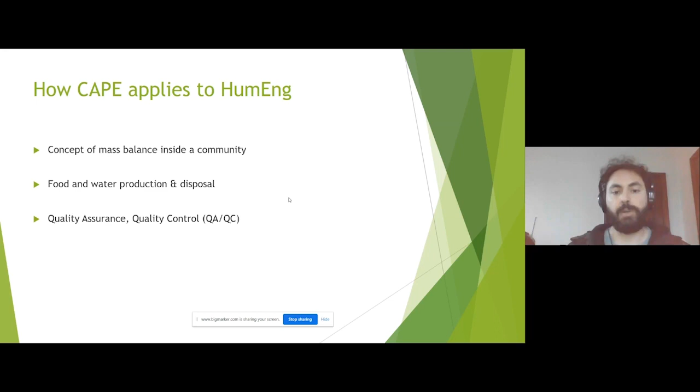And something that I think only us chemical engineers understand quite well is the limiting agent or reagent or reactant in these concepts. That's something I always think of - what would make this stop, or what's the most important aspect in whatever concept we're dealing with - and trying to go a little bit deeper on each of those concepts with my vision of humanitarian engineering.

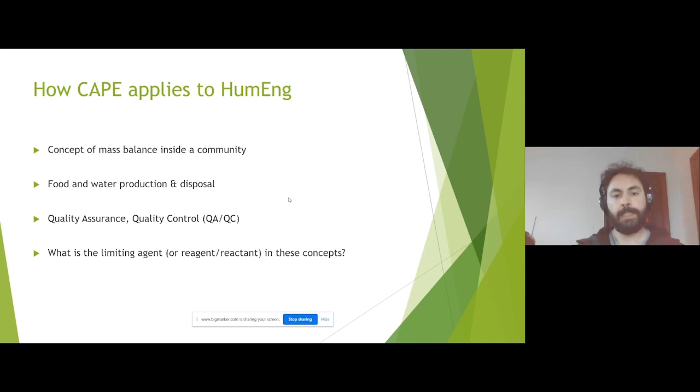So yeah, mass balance. Well, you look at the reactants, products, and byproducts. So what gets in and what leaves the community?

I think when I arrived to the community, the most important aspect for me would be water. This is drink every time, every day. So good water means good food. And when water-related disease outbreaks, it's very bad.

It spreads very quickly, so assuring you got good water is very important. So water and food - I think about the water as a whole. You got drinking water, wastewater, stormwater, irrigation in a community. A lot of people think, oh, this is the drinking water, wastewater, stormwater, but they are related. They can be reused, and that's very important to treat the drinking water and the wastewater, and understand the availability of those and seasonal changes as well.

So here in New Zealand, in Brazil, we are very lucky. We got good water, and it's available to most of people, but that's not the reality worldwide. And also seasonal change.

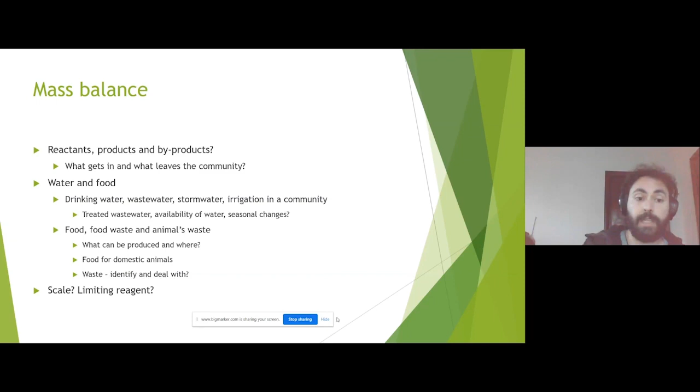And also the scale - what scale we're talking about, and what is the limiting reagent of it. Also, when we talk about food and water source, is it from the river, from rain, from groundwater? If you know the water source, we know a bit better what to expect about the water quality and what would influence its water quality.

So if it's from the river, you know that under storm conditions a lot of pollutants would go there, and if there's animals around, all the animals' waste would go there as well. So we need to be careful about that. Groundwater is another matter - so would be if there is any septic tank around that area, and then that's something that needs to be worked out with the community.

Quality and quantity - that's something I always think of when I think about water: seasonal availability, and treatment. Does it require any treatment, pre-treatment? Can it be used to wash clothes, wash hands, to drink, to boil? That's something that for chemical engineers is very core thinking when we arrive to a community.

Food produced locally or bought from other communities - what can be made locally that is currently purchased or traded? That's something I always looked at when I was traveling.

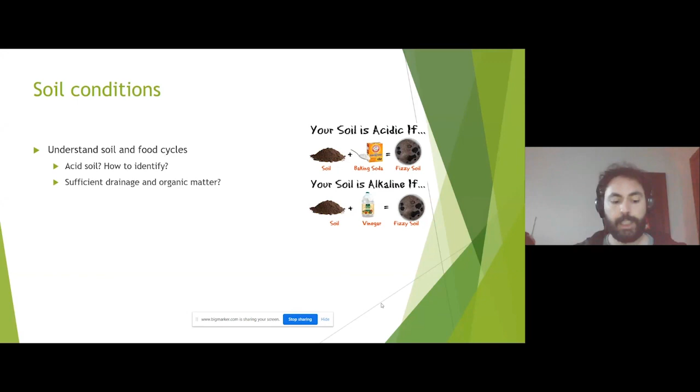There's no magic, just little tricks that might help people understand their soil conditions, and also if there is sufficient drainage and organic matter. If there is no sufficient drainage, the water doesn't flow to groundwater, and sometimes the soil is too dry, so when it rains there's only surface water running off, which doesn't infiltrate and recharge groundwater. It wouldn't make good conditions for plant growth, and that can have an impact. So if we arrive at a place we can identify those things, it's very good to help any community.

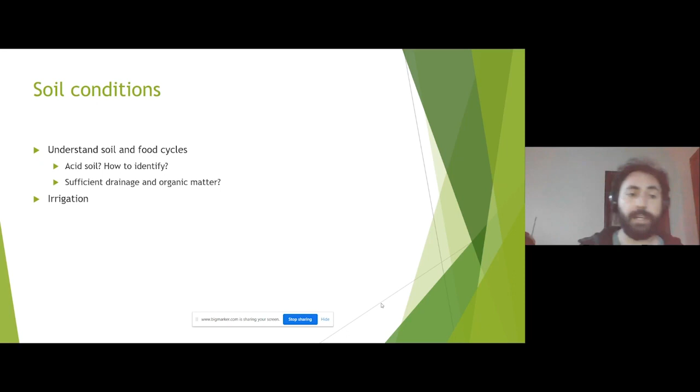Also irrigation - due to seasonal variability, if you work out the quantity and quality of water, you can actually use that for irrigation, for example, and also for the use of fertilizers for plant growth.

A lot of places don't have enough nutrients, so people tend to use synthetic fertilizer - you buy it, do the mix, and magically it works. But do we need it?

In poor communities, we have plenty of food waste, human waste, and animal waste that could be used as organic fertilizer. That's something I, as a chemical engineer, always try to think about because I've worked in a wastewater treatment plant, and you see that the solid waste from a wastewater treatment plant is very nutrient rich if properly mixed with soil and with good sanitation - it works even better than synthetic fertilizers.

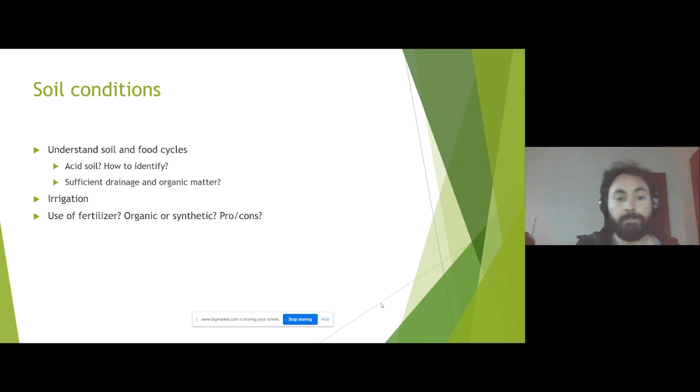So there are pros and cons. It's up to you to talk to the communities and understand their needs and their willingness to do something different or not - and also the wastewater treatment feasibility. So this idea here...

I talk about soil conditions because the way we deal with our waste affects soil conditions. For example, if you have a septic tank and a sinkhole, it's likely that you might impact the soil around it and also the groundwater. The image here is a concept of biogas generation for households, and this is actually one constructed in Brazil. It's becoming very common in rural areas.

As you can see, we've got intakes - the toilet or some animal waste - that goes to a gas chamber where anaerobic digestion happens, and the gas goes over here. Over here we've got an outlet, and the bio slurry that comes out is also nutrient rich, so you can use it to irrigate and fertilize soil.

And this, as you can see here, is a homemade one - a 3,000 liter tank turned upside down, which goes up and down depending on the amount of gas it has. Over here there's a 20 liter water container used as a filter, so the gas bubbles into the water and part of the smell stays in the water instead of going out in the line.

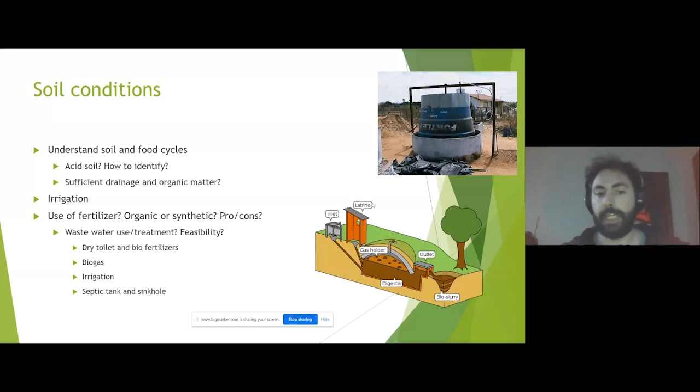That's how I think we chemical engineers should think when we go to a place, but there's also feasibility to consider. Brazil is a very warm country, and the weather is very good for this type of reaction. In New Zealand, that wouldn't be the case because it's a bit cold - a 10 degree difference in a microbiological reactor does make a big difference. So you need to judge the community's willingness to do that, and whether it's feasible as well.

And also quality assurance and quality control. I think the COVID pandemic brought to us the sanitation standards, and that's something we need to talk about with communities, because these sanitation standards are different worldwide, and the more we talk, the better it is. It would be about the water aspects, the food aspects, and also what they use to irrigate or fertilize the soil, if that's hygienic as well, pesticides and other things. So I think that englobes a very wide range.

But it's definitely our job to look at and talk about it. So when we talk about QA/QC, which is the best process for drinking water, they scale limited reagent and trained people, so to do short term, mid term, long term. That's something we need to think about. And there's a wide range of different techniques you can perform, so it's up to us to judge.

So this one is a UV light technique that kills up to 99% of the germs, exposed for around 24 hours. Boiling water. This is a chlorine tank, chlorination tank, and this is very common back home in Brazil. It's a classic ceramic filter, so it uses gravity to filter, so it's very slow. But because it's ceramic, the water stays fresh, and it's very good to drink regardless of the outside temperature.

And also food preparation and preservation. That's very interesting because a lot of people leave food unattended, drying in the sun, and you've got flies, you've got worms, you've got a lot of things. So how do you prepare and preserve food with minimal sanitation standards? I think as chemical engineers we can actually talk about it and explain this to the people.

And the last one would be feasibility of production. It's very good to empower people to produce something, to do something that might generate profit, or even avoid having to buy from a source outside the community. One thing that I think is important, that my grandma used to do like 30, 40 years ago, was soap.

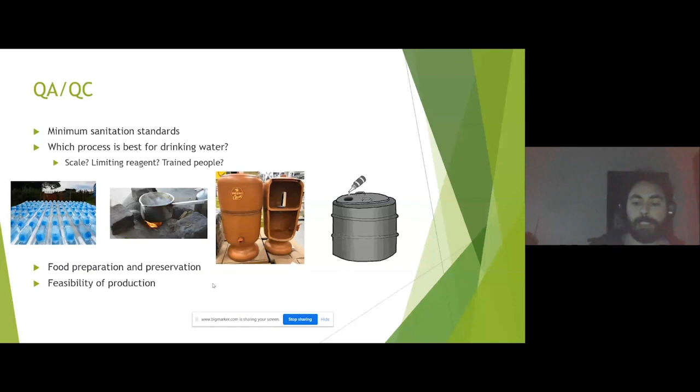Into water and community-based engineering. There are a few questions from the audience that I believe we can cover. So the question from Samson.

Was it securing your first bit of work experience? Say again? How did you go about showing the initiative for your first construction job overseas in New Zealand?

It was interesting because at the time I didn't have a work permit, a work visa, so I was a tourist at the time. So actually knocking on companies' doors and asking for a job, saying I'm an engineer, I'm looking for a job, I'm up for anything. And this company actually hired me because I hold an engineering degree. It was challenging because most of the working tools I'd never used before, but once you understand the technique, it's good. It was very rewarding, helping rebuild the city.

I agree with that. There's a question from Azriel. It is so important to make sure you're introducing the community to planning discussions. Have you found any key techniques for bringing your experiences and knowledge to these human-centered designs?

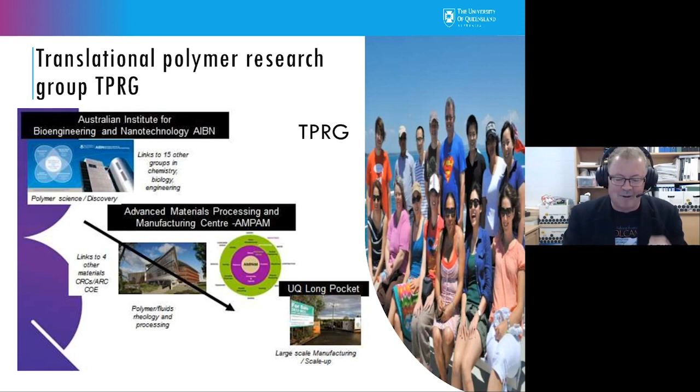Our TPRG is spread over many buildings here at UQ, but essentially it goes from polymer chemistry through to polymer processing and chemical engineering through to modest size scale-up processing at our UQ Long Pocket labs. Industry comes in sometimes to do what they call small, we call large, batches of extrusion or film blowing out at Long Pocket. So we're a very translational group.

Why would we want to look at sustainability now? Well, we live on a big spaceship and we need to live sustainably, and as yet there's been no other spaceships for us. So that's very simply why we need to be careful about what resources we're using. In terms of plastics, since the 60s we've seen basically a 20 times increase in plastics being produced, but unfortunately only about 9% of it is recycled.

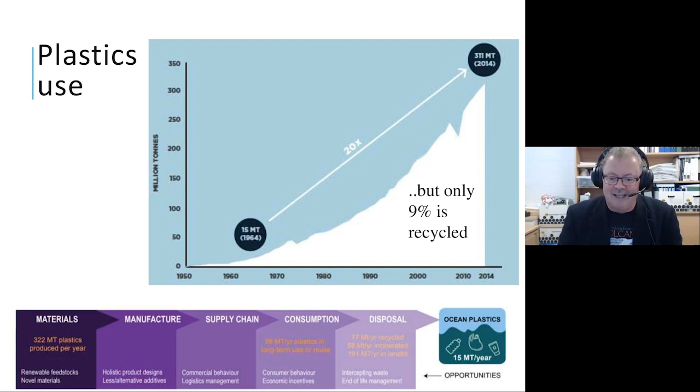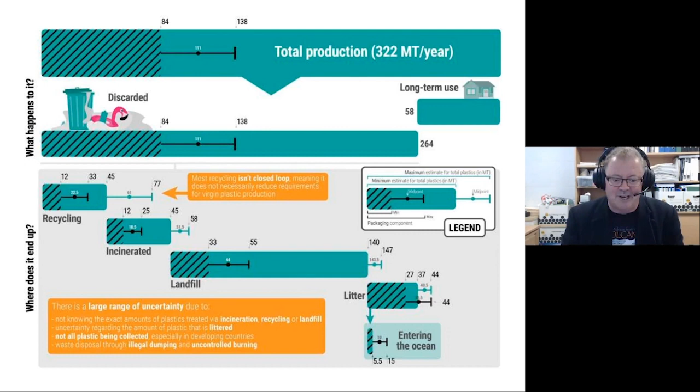So we have to do something about our use of plastic, and that doesn't mean we throw everything away, because some plastics are very important. They stop food waste, for example. They are protective. Some are high performance plastics that reduce weight in vehicles and therefore increase fuel efficiency. But we want to make sure we value the plastic all the way through to its end of life, and in fact we want to generate new markets for plastics.

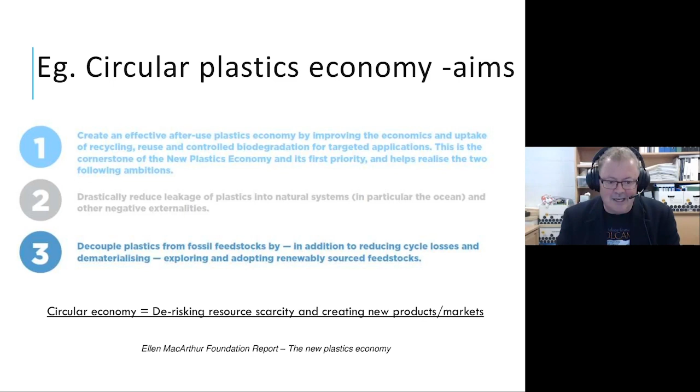She's basically said there's three things we need to look at for the circular plastics economy. They're written up there, and they're also on this diagram too. Firstly, she wants us to look at an after-use plastics economy.

Normally when virgin plastic is used, only 9% of it's recycled. We want to increase that amount of recycling by making other uses for plastic waste. In fact, she doesn't want us to use the term plastic waste. We want to keep saying plastic is a resource that is wasted at the moment, and we want to make sure that resource is recycled and reused.

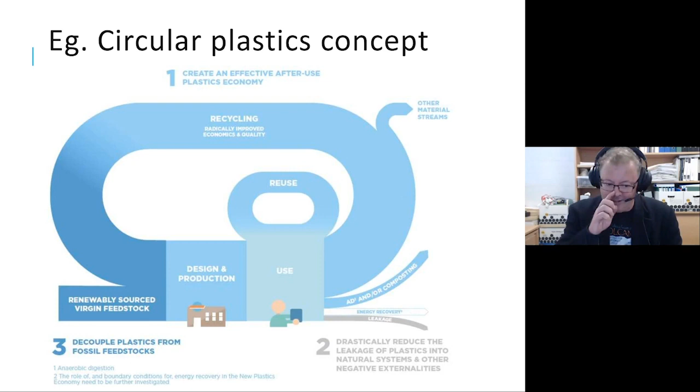And also, this will mean stopping leakage of plastic into the environment, like with marine litter and any litter actually, and also decoupling the use of plastics from traditional fossil feedstocks and maybe looking at biosources.

And that's probably where our research comes in. Traditionally, plastics are usually produced and then perhaps either recycled for reuse, or you can look at chemical recycling or mechanical recycling of plastics, or even returned to original materials and then reprocessed. But what we're talking about here is this additional bio area.

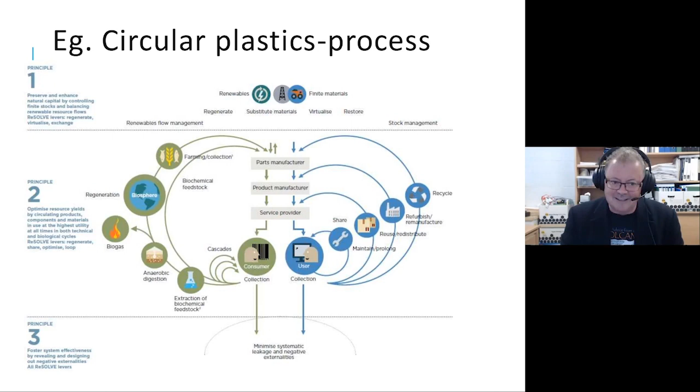What if we started to also get bio sources for polymers and plastics, and we're able to recycle them, either back through anaerobic digestion into biogas, or back into use as a biochemical feedstock for further plastics. So I guess that's what this talk is about, the bio part of the circular plastics idea.

Many people have probably seen the different ways of what happens to plastic waste. A lot of it's happening at the bottom, but we can push upwards and try to look at other options for plastic waste. It has the same calorific value as fuel, so why are we not trying to retain energy at the very least from plastic waste?

Can we recycle? Can we compost? Can we reuse it? Can we reduce its need to be used in the first place?

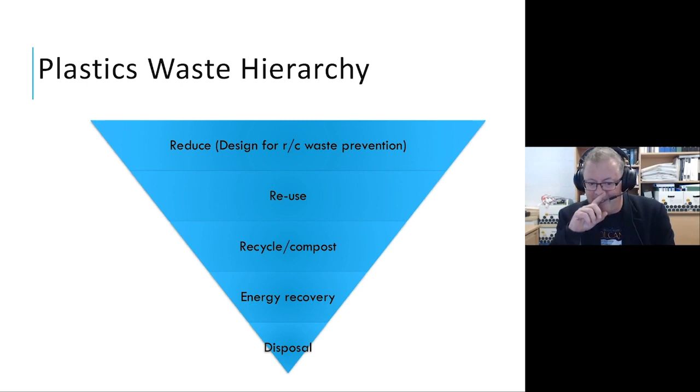Dow Plastics at the moment have huge research going on about replacing the 7-layer multi-layer film made of essentially different types of plastics with just one layer and maybe some clever nanomaterials inside that achieve the same type of barrier properties as the multi-layer film would, and therefore the single-layer film will be easier to recycle. So anyway, there's different ways of trying to stop plastic waste.

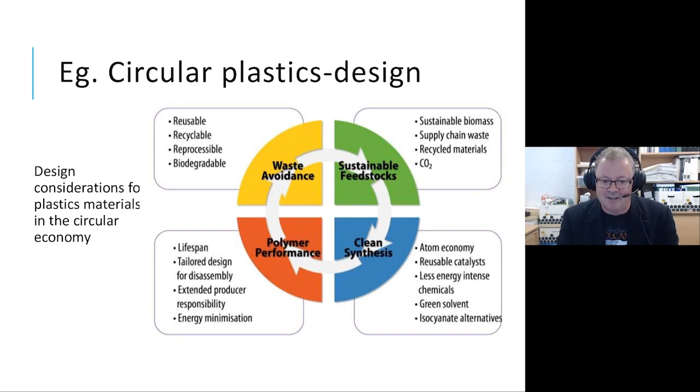Here at UQ, we are looking at each of the different areas. I'll talk today about sustainable feedstocks and biofeedstocks, but of course we can focus on other things: clean chemical synthesis, the actual optimization of your polymer processing itself can be a sustainable polymer area, and even avoiding the waste in the first place, or creating new biodegradable materials that are able to be composted and recycled in the broadest sense.

So we've established an approach here at UQ. There's a new UQ Plastics website, hooray, just Google UQ Plastics website if you want to see. But essentially we're trying to examine the entire supply chain, including information like social sciences, consumer behavior, policy from government, and end-of-life management.

Do we need more waste conversion facilities in Australia? We probably do. We're missing data. Do we know where plastic comes from? The other day, one of the NGOs who's looking after the barrier reef and plastics in the barrier reef said, did I know that 90% of plastics north of Cairns on the beaches come from overseas?

No, I didn't know that. But I guess with lack of people north of Cairns, it's probably where the plastics is coming from. But that's an example of getting some data and trying to understand where the waste comes from before you can solve the problem. Sounds simple, but some people are trying to throw solutions at problems at the moment without actually understanding where the problem is.

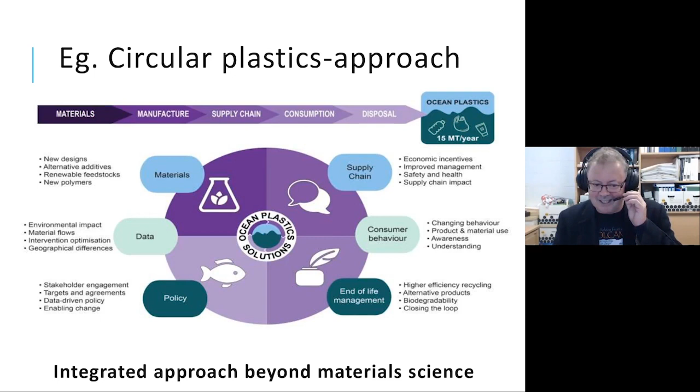And I guess it's the same thing in a different diagram. So we're trying to introduce human factors and data, cycles and impacts, to our technology that we've been working on for many years at UQ, to hopefully have this integrated solution.

Andrew Liveris today just gave a talk on Zoom at UQ, and he kept talking about the power of 'and' and the tyranny of 'or'. So look for a solution that is a technological solution and people will use it, or people will understand how to use that technology, or do a technology that actually focuses on the area of waste that you know to be the true cause of that particular use of that plastic.

And of course, the foundation is undergraduate courses. We're trying to develop PhDs, masters, etc., in the whole of this integrated solution to circular plastics.

This is probably too much information, but anyway, let's just say this UQ Polymers or UQ Plastics Centre now has a number of people around the university on different areas, as you'd imagine, from production, consumption and manufacturing, in this three-tiered approach of technological, social and political or policy solutions.

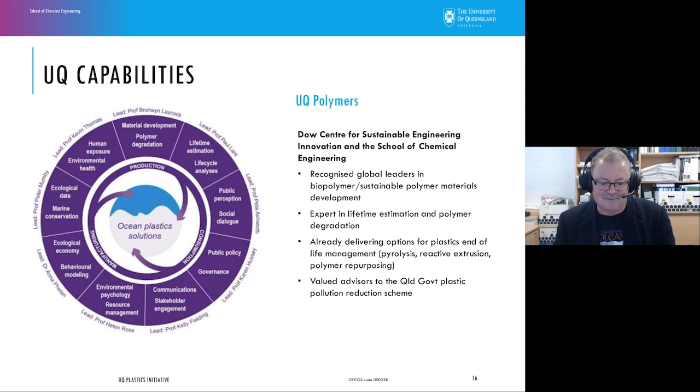That brings me to the case study. I just wanted to show a couple of slides on our 20-year history of developing bio-based plastics.

This started in 1995 with the Cooperative Research Centre of Food Packaging. It involved us, so CSIRO Melbourne, Swinburne University in Melbourne. Basically, it was the best project ever.

The brief was: design a totally new type of plastic based on starch. It allowed us a lot of freedom, and there was a lot of industry partners like Goodman Fielder with the starch supply, ACI Packaging who wanted bio-based packaging, and they allowed us to examine all sorts of different plastics products for 7 years.

So essentially, then Plantic was formed, a startup company. Plantic, the name comes from plant, or plastics from plant. That was formed, and then the good thing is that we were helping them, first as contracted researchers, then through linkage grants and PhD students, in developing their entire new product line.

I'll show you soon what products were made, but this was a really exciting bit because the students - undergraduate students doing thesis projects, PhDs doing PhD projects, and overseas students coming for 6 month placements who in turn stayed to do PhDs - were all developing new products for a startup company that was essentially formed out of the ideas of the CRC's PhDs. So it was a really cyclic, nice story.

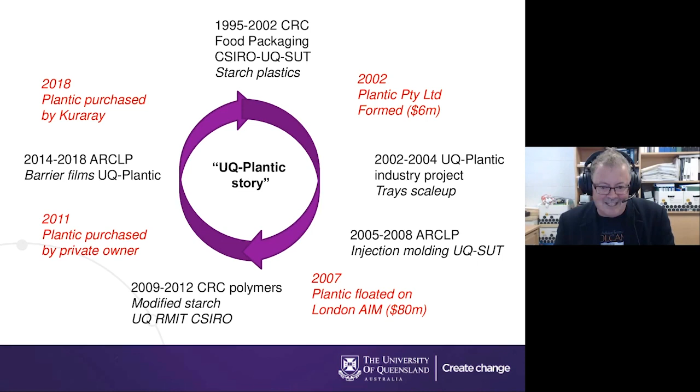Why were we successful? We thought it was because we were based on low cost, or cost competitive, biodegradable plastics. They used conventional equipment, didn't need special equipment, and they were not over-engineered.

A lot of people don't know these standards - ASTM standards that actually specify, say, what's required for a garbage bag. Polyethylene is probably 5 times over-engineered for garbage bag use. No one knows that unless you look at this standard and see you only have to meet about 1/5 of that standard. We can do that with our starch-based plastics.

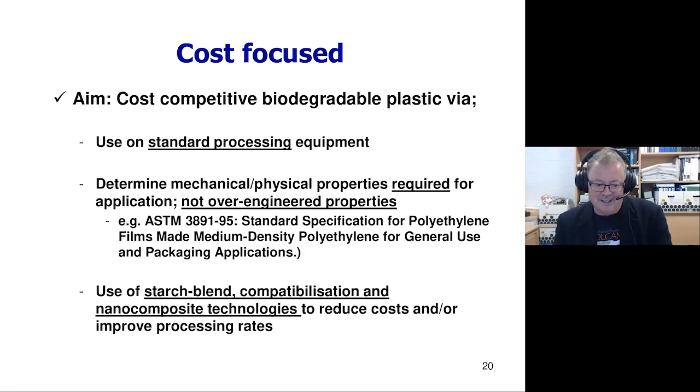So not over-engineering properties was the second point, and then using some clever technology that came through the work - through nanocomposites, through blends, through multi-layer materials.

So what came out? Well, first to come out was starch mulch films. I think we were the first in the world to blow these very thin black mulch films used for greenhouse films for tomato crops, capsicum crops - stops weed growth, allows even temperatures underneath your crops, helps retain moisture in the soil so you don't use as much water. We got really good trials that were scaled up, and I think that was the first type of product.

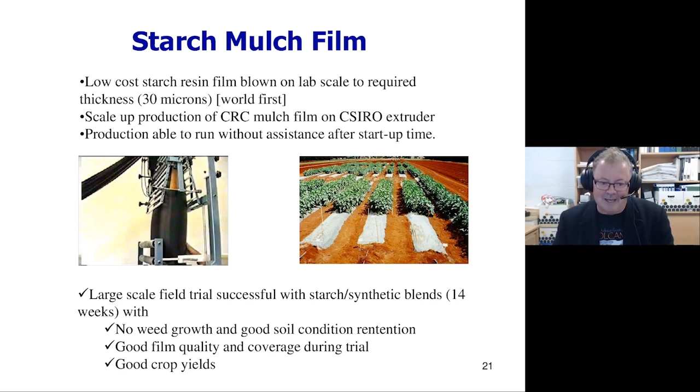They wanted us to design a bucket that would fail and the water would release at the same time as the insecticide would wear out, so the mosquitoes wouldn't come back, because dengue fever mosquitoes only lay eggs in very still water. So this is why they were using these. But anyway, we were able to produce a cup that failed at the right time.

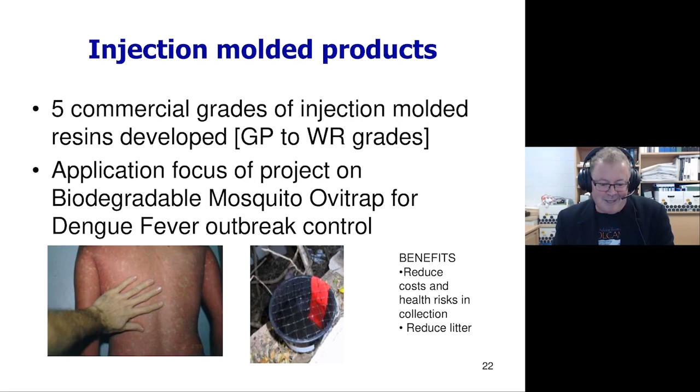And so this was our first product from Plantic. The next product people might have seen more about is the Cadbury Dairy Milk trays and Arnott's biscuit trays. It was made by water-soluble starch-based materials. They also used it in the Easter egg display eggs as well. But then they got stuck, that they had only got products that were water-soluble.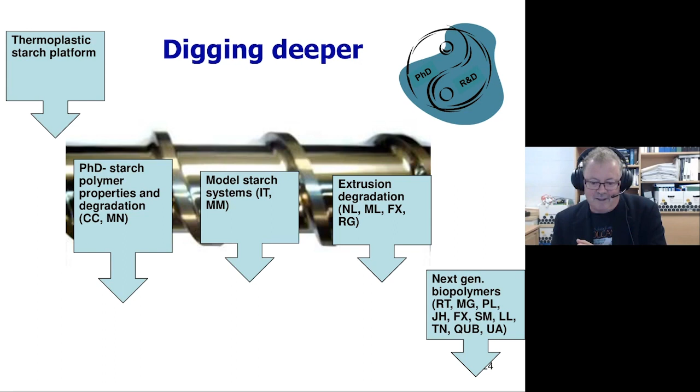So we then did many years of these linkage grants, ARC linkage grants with PhDs, working on further understanding what was really happening with the interaction of the starch polymer with the environment. We looked at properties, degradation as a function of environment. We looked at model starch systems. Can we actually grow starches or genetically modify them to have better properties for films? And what is going on with the extrusion? Are we degrading the starch while we're extruding them at these various conditions? So hopefully this would lead Plantic to new types of products.

And what happened? We came up with a better way to produce very, very thin Plantic films. So these were aimed for barrier property films. That was a great idea.

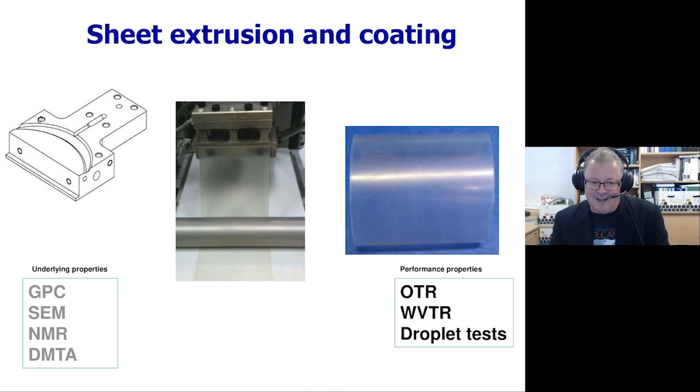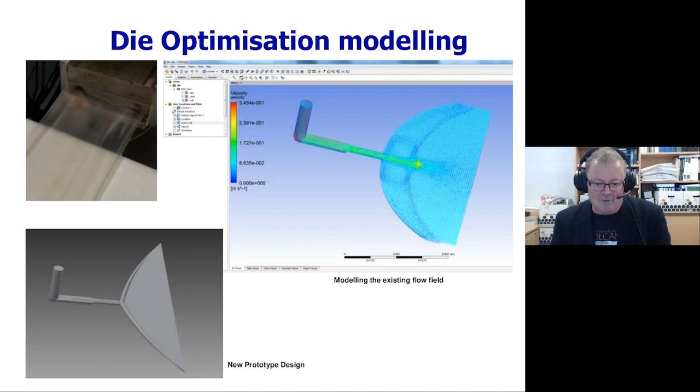That came from understanding flow through the die a little better. This is an unusual shaped die - it's not a polyethylene shaped die, it's actually a starch shaped die, because we don't want to have sort of rectangular or 90-degree angles, because that's where starch degrades quite a lot. So we want this nicely shaped die so there's no spots where the starch can sit and degrade, basically.

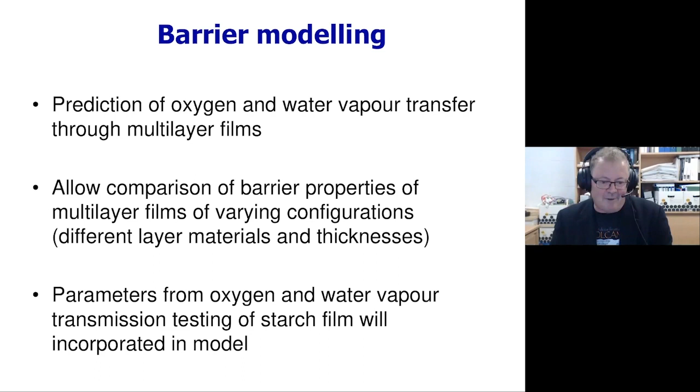But we then examined the barrier properties. It looks like starch, when it's in between a multi-layer of PET and starch, has excellent oxygen and water vapor barrier properties. So we actually found that out by doing a range of tests on different types of multi-layer films.

And then Plantic launched the meat trays in Coles back in, I can't remember, maybe 2013? No, that doesn't sound right. Anyway, after 2012. So they'd made both the film on top of the tray and the meat tray itself from Plantic material, because it had good barrier properties in this multi-layer format.

And what did I learn? I learned that this was fun - this whole idea of doing research at a university, but also engaging with a cooperative research centre with many people around Australia, and then the PhDs who worked in the CRC and then subsequently with the startup company got fantastic experience. So imagine getting a PhD and an exciting startup company experience at the same time.

It was a bit dodgy at times with the cash flow not coming into the startup company. However, University of Queensland and the CRC backed us, essentially backing the entire scholarship of the PhDs so that they would never be left high and dry. And also there was engagement of the honours students and the vacation students from overseas, and it was excellent. We had at one stage postdocs supervising PhDs who were supervising overseas students, so everyone was getting supervision experience as well. So that was a few learnings from that experience.

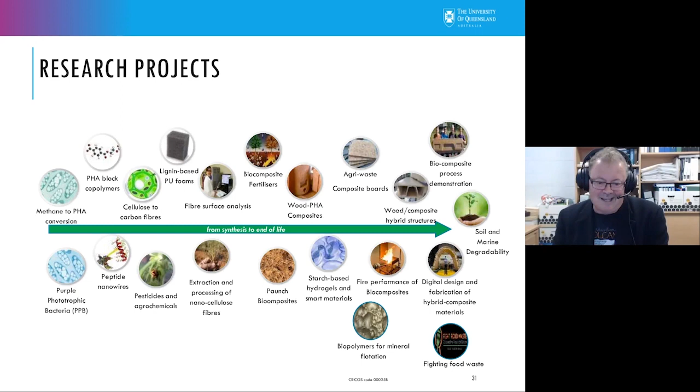We think this is a great big area inside the circular economy in the area of plastics. Obviously, other materials for batteries, carbon itself, are other materials that should be looked at very closely in this new circular economy. We'll be looking at other projects involved in marine plastics, collecting data on where that's coming from, and also our traditional area of high value added polymer materials design and manufacturing. Maybe we can start designing materials for recycling and reuse from the very start, instead of waiting until we get to the end and worry about recycling them.